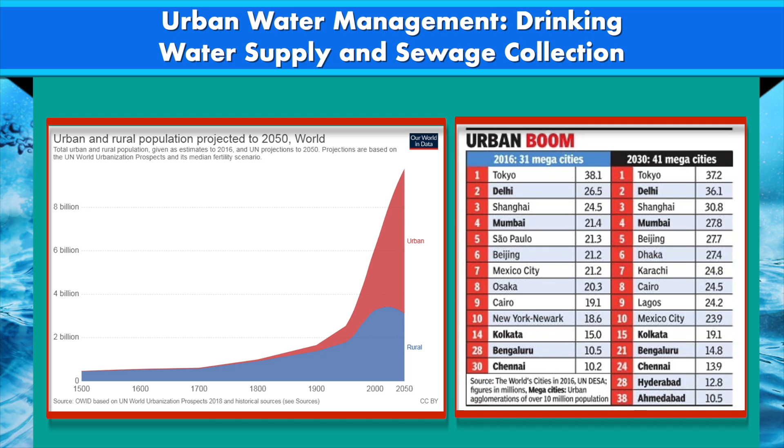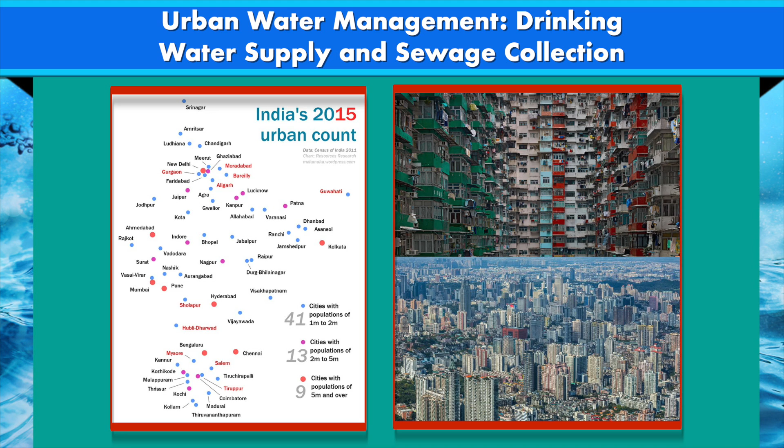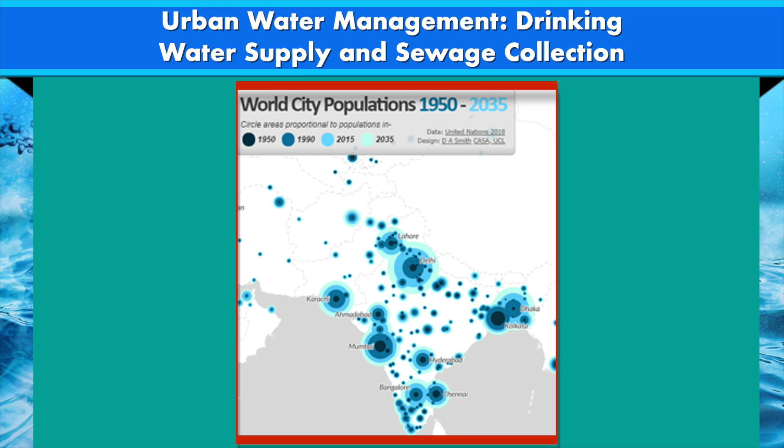India has 6 megacities with population over 10 million and another 47 cities with a million plus population. Since 1990s, most of Indian cities have grown exceptionally large and now accommodate a big chunk of neo-urban population. However, in most cases, cities could not keep pace with the rate of population growth, hence they lack adequate infrastructure and services such as paved roads, adequate water supply and sanitation facilities.

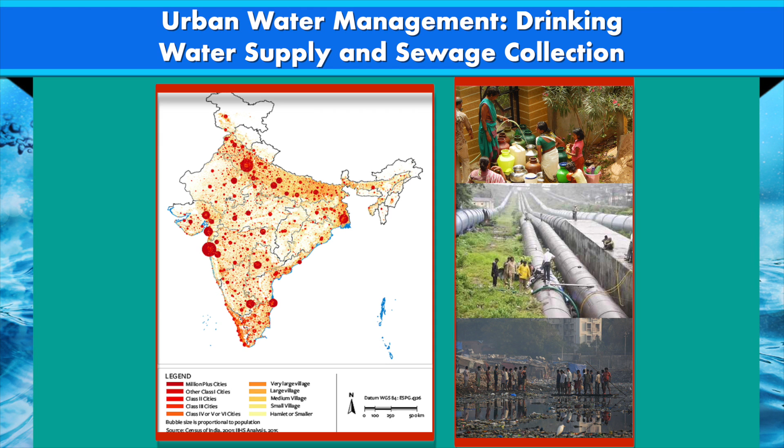Overall, there are over 4,000 towns in India and many do not have adequate municipal infrastructure for growing needs. With 459 million people in urban areas, India is one of the fastest urbanizing nations. India obviously faces several issues in urban water supply and sanitation infrastructure and their management.

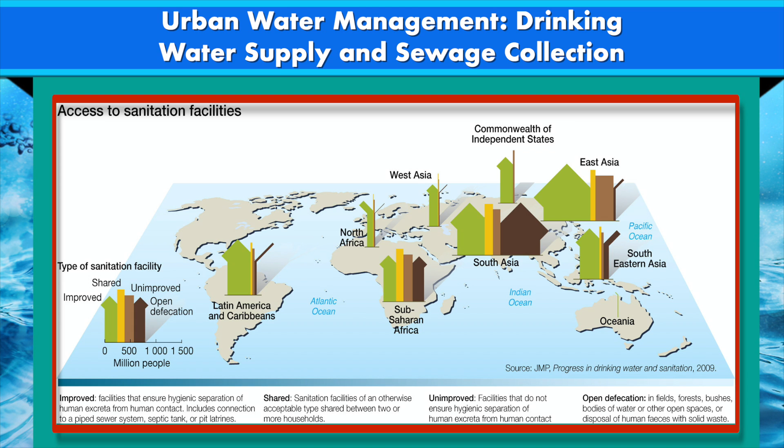Across the world, the local municipal bodies or local urban bodies manage the supply and collection of wastewater. Hence, in this lecture, both topics will be covered.

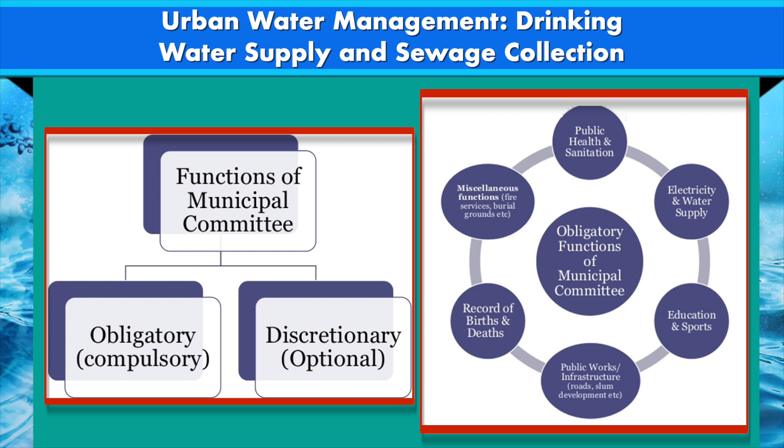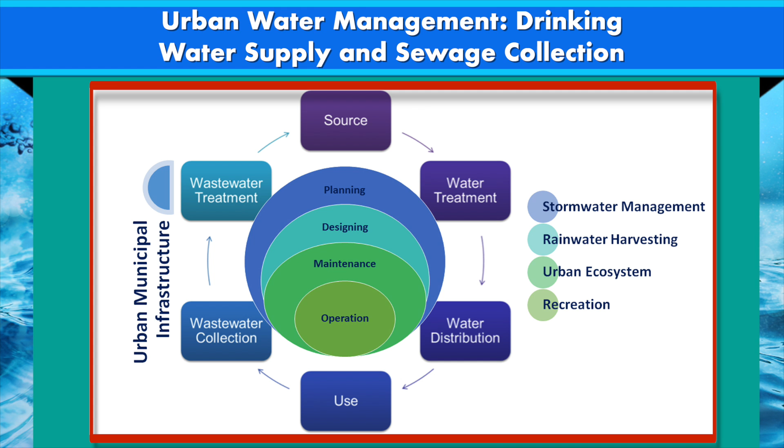Urban water management comprises the planning, designing, maintenance and operation of urban infrastructure for meeting the standard service requirements for drinking water and sanitation. Besides, various civil engineering structures are also put in place for controlling the stormwater runoff, for promoting infiltration and rainwater harvesting, and to meet the need of urban ecosystem and recreation. Hence, urban water management is an integral part of urban planning.

Unplanned and unforeseen vertical and horizontal growth of cities adds several stresses to these services. Now, let's talk about municipal water supply system.

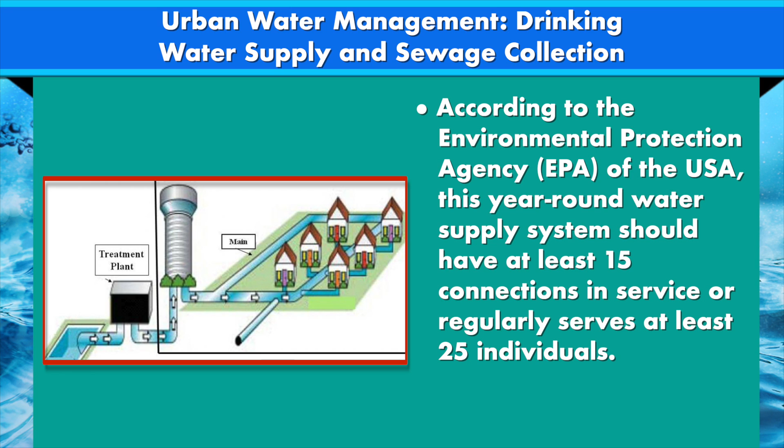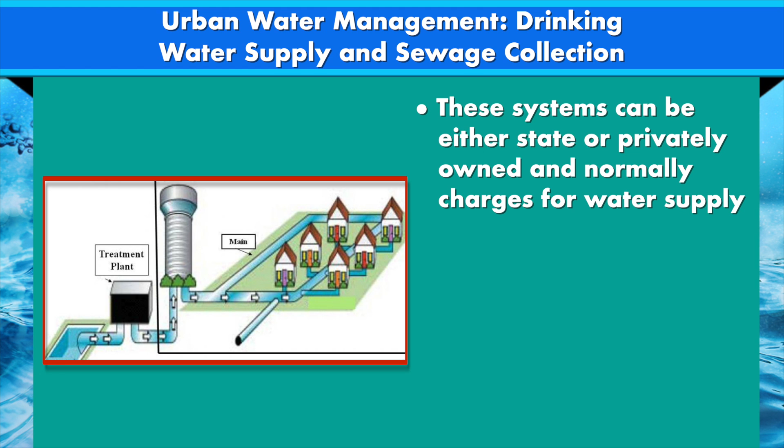Municipal water supply system is a public water supply system to supply fresh water for human consumption through a setup of pumps and pipes. According to the Environmental Protection Agency of United States, this year-round water supply system should have at least 15 connections in service or regularly serves at least 25 individuals. This system can be either state or private owned and normally charges for water supply.

Before supplying, municipal water is processed and treated to meet the drinking water quality criteria. A community's water consumption is characterized by numerous requirements including domestic demands or public need, commercial and industrial uses. There is usually a wide disparity in total water requirement of different communities.

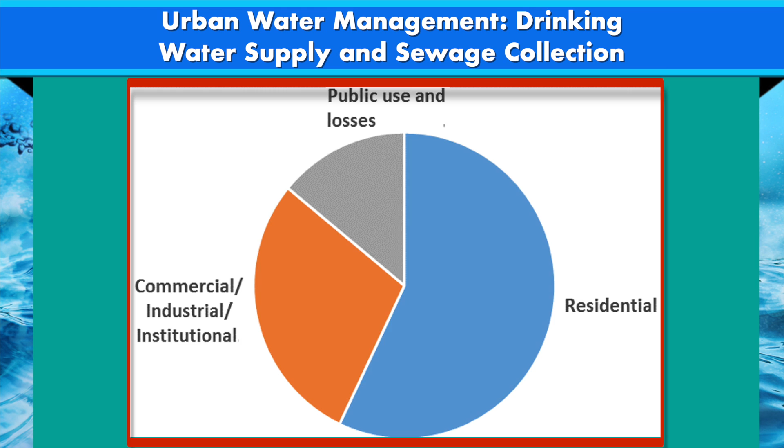Water requirement for drinking, cooking, washing, laundry and other household functions come under domestic demands. Water used for street cleaning, used in schools and other public buildings and for fire safety comes under public needs. Commercial and industrial demands include water for hotels, restaurants, laundries, stores, offices and most manufacturing plants.

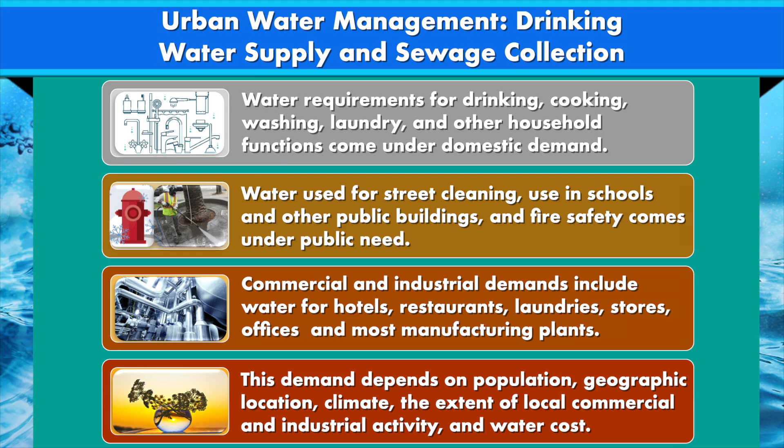This demand depends on population, geographic location, climate and extent of local and commercial industrial activities and the cost of water. These municipal bodies require huge quantity of water on daily basis. Let's see where from these institutions bring the water.

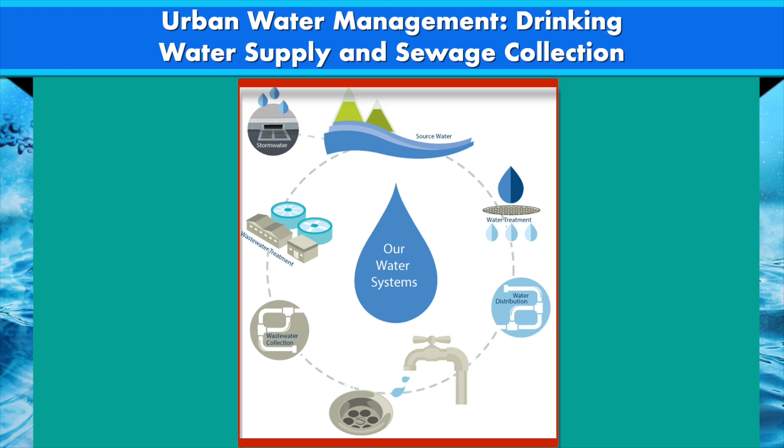Water supply system receive water from various locations after appropriate treatment including groundwater, surface water and sea through desalination. Both groundwater and surface water is essential for fulfilling the water supply needs of the communities. Reservoirs and lakes are the usual source for water to the large cities, whereas groundwater is a common source for single home and small towns.

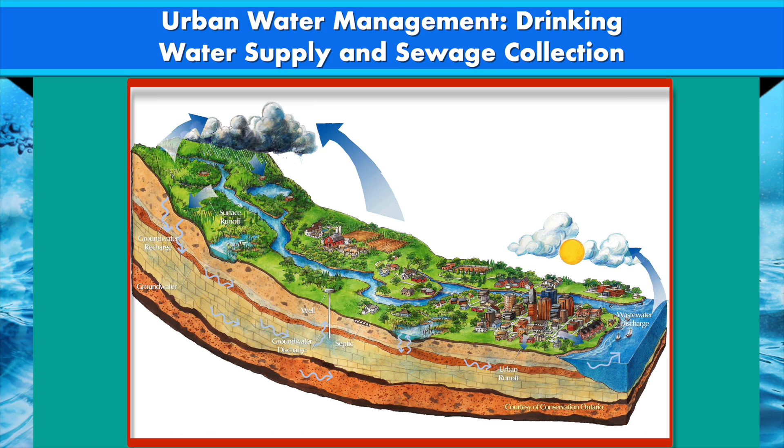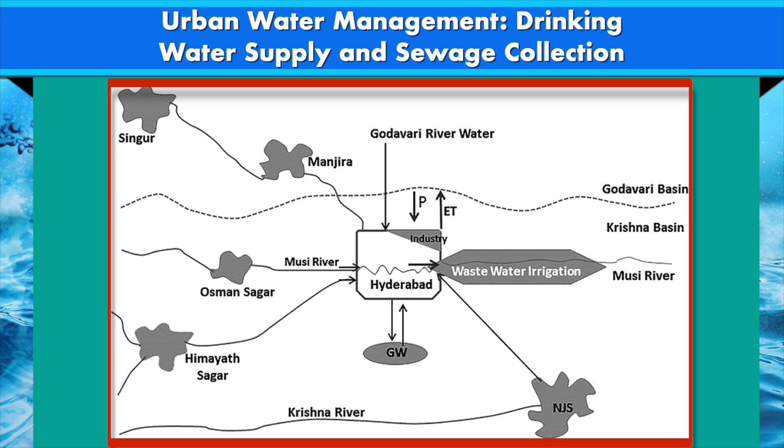Generally, raw water is collected from groundwater sources or from a surface water source within a watershed. However, in most cases, the water demand of mega and large cities are much higher and usually met by inter-basin transfer of water. Let's learn it more by an example.

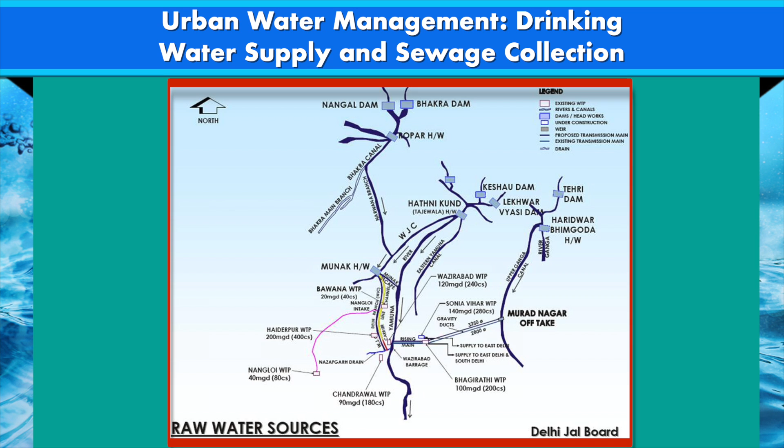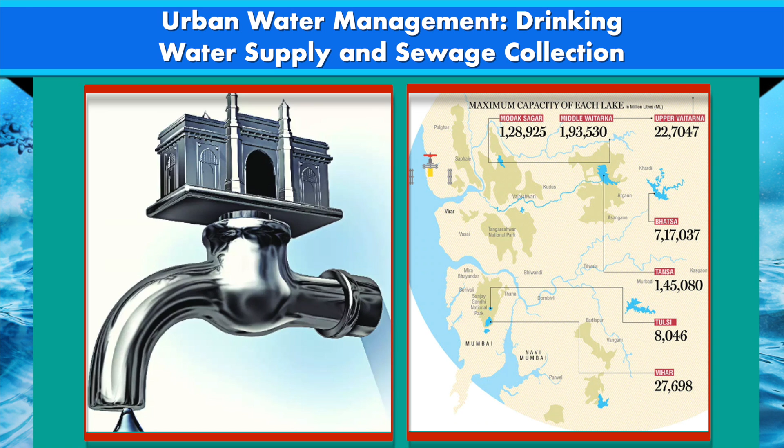If we talk about Mumbai, with over 20 million residents, Mumbai requires over 1100 million gallons of water per day. However, the civic body BMC supplies 990 million gallon water per day. At present, 7 lakes or reservoirs located in Mumbai, Thane, Palghar supply drinking water to Mumbai city. The water is transported to the city from the sources located within a city or a distance for over 100 km. The water procured by the municipal body cannot be supplied directly.

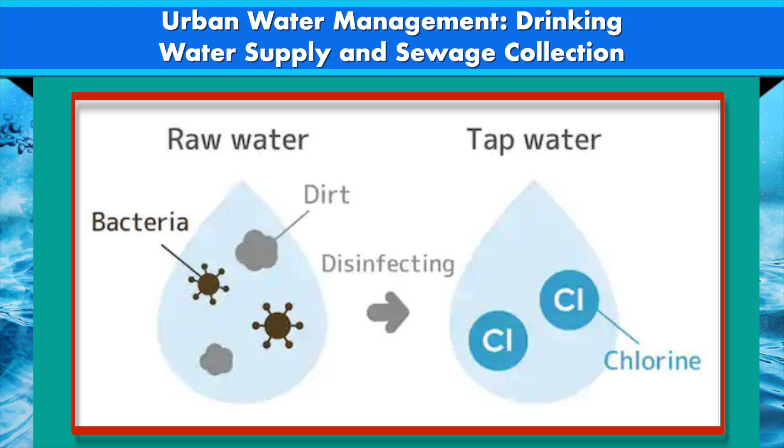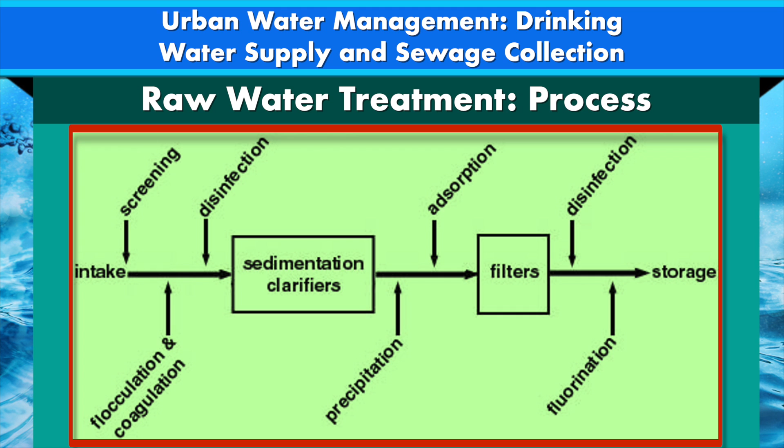Depending on the source of raw water, water may contain varying amounts of trash, suspended materials and dissolved constituents. The raw water obtained from groundwater or surface water sources requires treatment to meet established minimum water quality criteria. In general, water treatment steps include purification, disinfection through chlorination, and sometimes addition of fluoride. A variety of physical and chemical processes are used to treat the raw water.

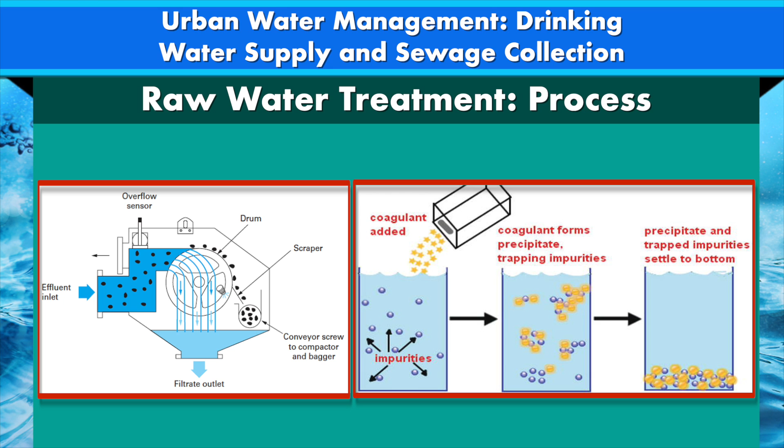The conventional water treatment process of surface water consists of screening and straining, chemical addition for coagulation and flocculation, sedimentation and clarification, filtration, and disinfection.

Screening and straining is a physical process to trap debris. Large metal screens are placed in front of surface water intake to trap large items while water passes through. These screens require routine cleaning. This process not only helps in having a sense of clean water but also reduces the chance of debris getting stuck in the impeller of water pumps.

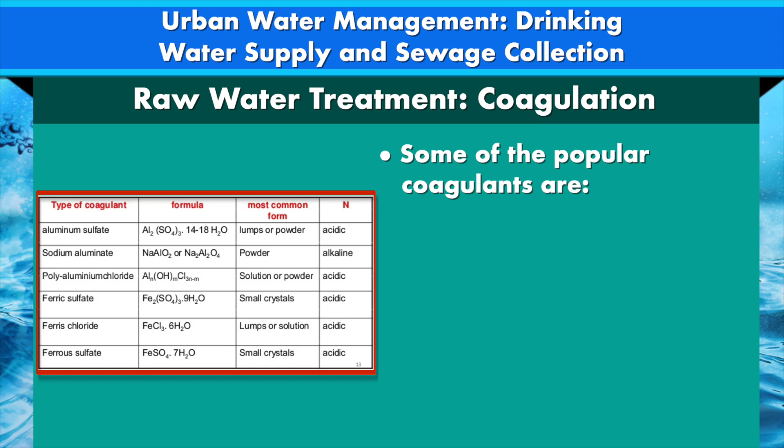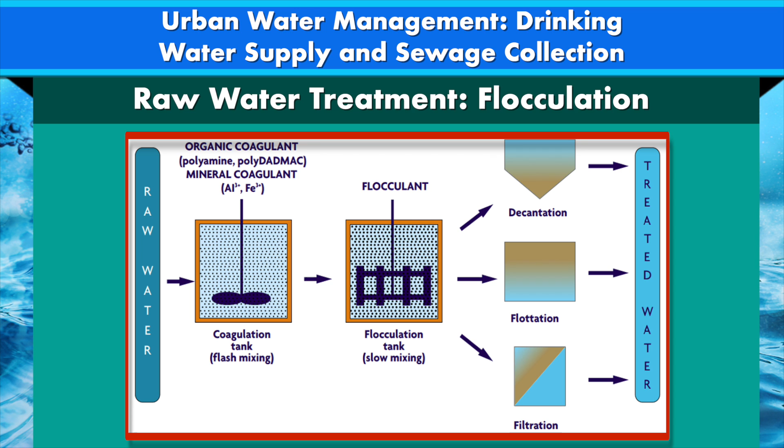Once water is received into the treatment plant, coagulant chemicals are added to clump the floating suspended particles. Some popular coagulants are used in this process. Rapid mixing units or flocculators are used for quick and thorough mixing. Subsequently, the speed of water mixing is stabilized to facilitate formation and growth of floc and settlement in clarifiers. This process also helps in removing the majority of suspended material prior to filtration. It is a crucial step to avoid overloading or choking the filters, hence facilitating more water to be filtered before the filters are washed.

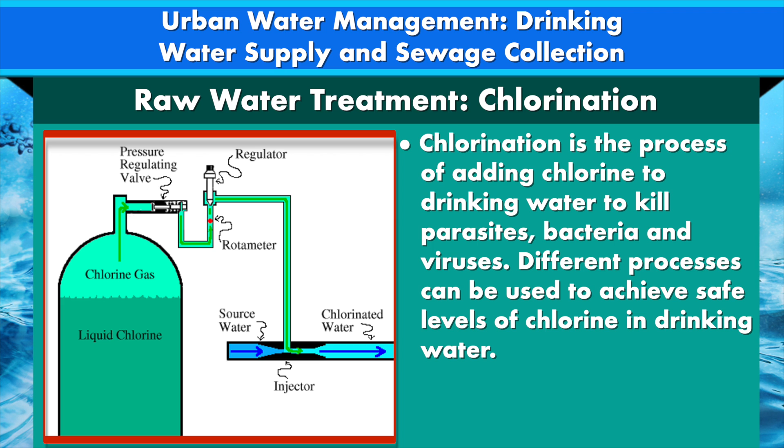In the process of filtration, clarified water is allowed to drain through layers of sand and gravel. At this stage, the water looks clean and clear. However, this water might still have biological contaminants such as bacteria and viruses. Therefore, a chlorination process is employed as a common disinfection step. Either chlorine gas, chlorine dioxide, or hypochlorite bleach is added in a known amount to ensure all microorganisms are destroyed. Excess addition of chlorine may cause odor and taste problems for consumers.

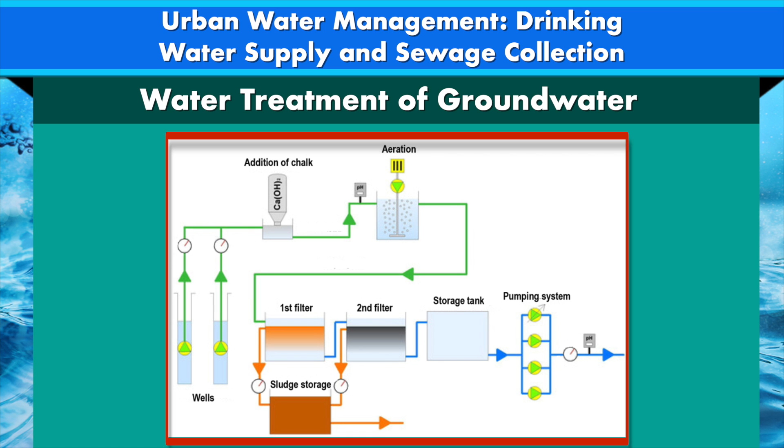Groundwater does not often require clarification, but it should be disinfected as a precautionary measure to protect public health. Additionally, processes of softening, aeration, and fluoridation may be used based on the quality of raw water. Some water treatment plants utilize water from more than one source. Blending groundwater with surface water is a common practice to improve water quality. In coastal areas with limited availability of fresh water resources, desalination processes are used.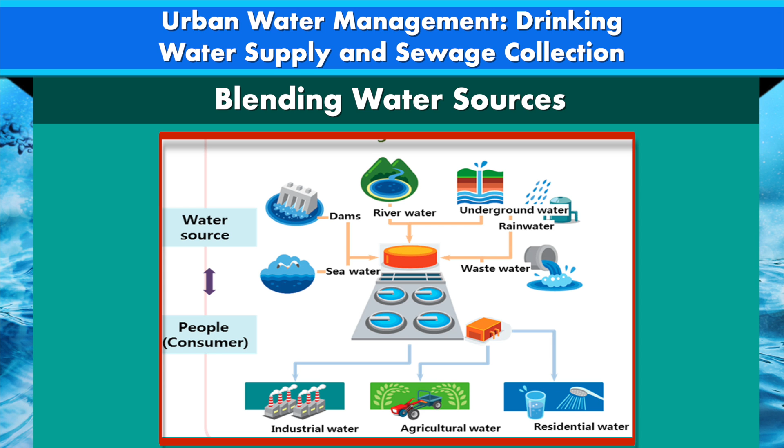Now let's try to understand this process by the example of Delhi Jal Board. Delhi Jal Board is equipped to treat 790 million gallons of water per day, inclusive of about 100 million gallons of groundwater. The four-step process starts after raw water enters a water treatment plant before releasing it to the public.

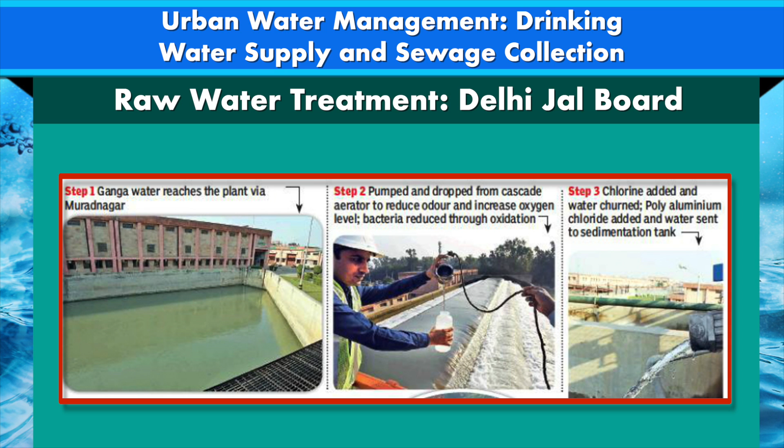Through pre-chlorination, impurities are removed using screens, and alum and polyaluminum chloride are mixed into the water to remove mud and dirt. In the second step, both chemicals together act as a coagulant, clumping and allowing suspended particles to settle in the water, which are removed during clarification as sludge.

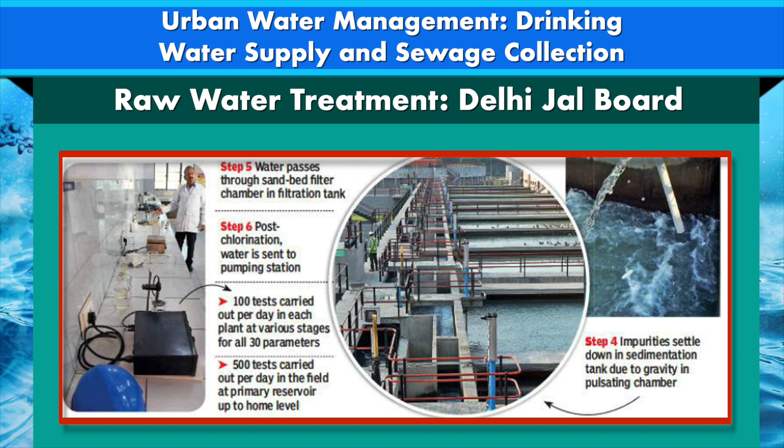This clear water is then allowed to pass through sand and gravel filters. In the fourth and final step, chlorination is done to kill pathogens during storage and transport.

The water samples collected before and after treatment are analyzed for 30 physico-chemical and biological parameters by the Delhi Jal Board. After the treatment steps, water is ready for supply and is stored either in underground tanks for direct pumping or is pumped to overhead storage tanks before supply.

The stored water is pushed through a complex network of mostly underground pipelines consisting of transmission lines, distribution lines, and service pipes all over the city. This distribution system consists of large water pumps at the treatment plant, overhead and underground water storage tanks, large and smaller pipelines, shut-off valves and water meters in houses or buildings, and taps at the household level.

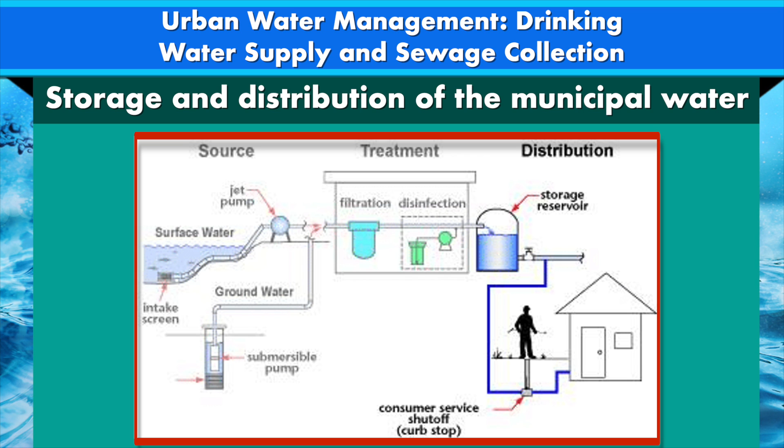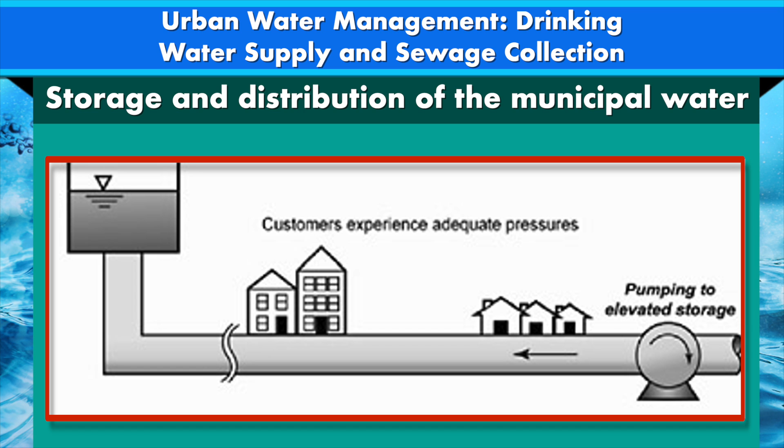These systems are designed to maintain sufficient pressure for the operation of plumbing fixtures and fire hydrants and to deliver adequate quantity of water to the end users. Too much pressure may result in leaks and breaks in the pipelines.

In the case of Delhi Jal Board, treated water is supplied to large primary underground reservoirs for storage. From these underground reservoirs, water is supplied 24/7 to different parts of the city using water pipeline networks stretching over 13,000 kilometers. From a primary underground reservoir, water is either supplied directly to colonies following a fixed schedule, or is sent to a secondary underground reservoir to cater to a group of colonies.